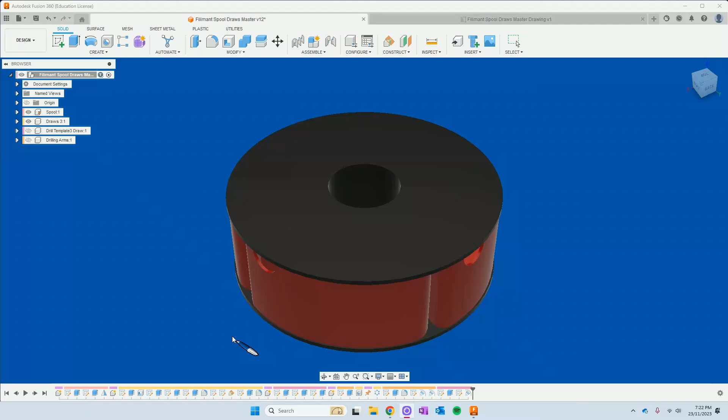G'day guys, this may look like just another 3D filament drawer project, but it is so much more.

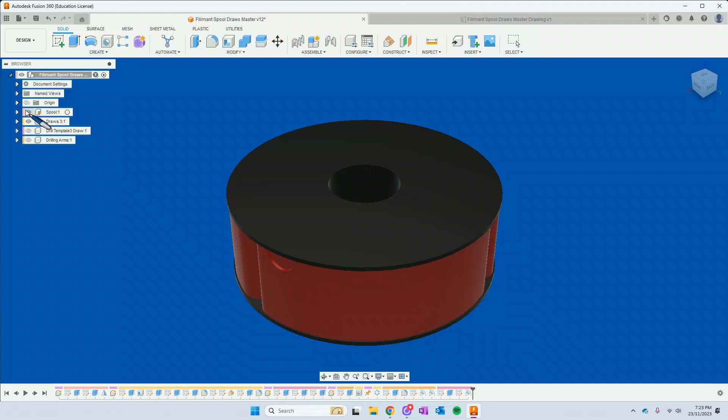It's capable of having the number of drawers change by me typing in a different number, and you'll see it's now changed to a 5 drawer. If I change it down to a 3 drawer, and I'll show you how in a moment, you'll see that it will update to just a 3 drawer. And if I turn the spool off, you'll be able to see that inside. So going back up to a 5 drawer,

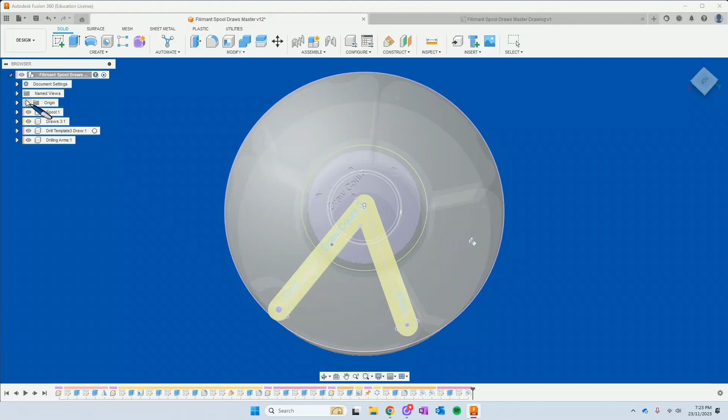and it's that easy. It also has a couple of templates on the top that when your spool is on there, it allows you to drill holes in the appropriate spots so that you know that you've aligned correctly for the screw hole, and there's a little knob that locks it in when the drawer is shut. So let's jump in and have a look at how this has all been done.

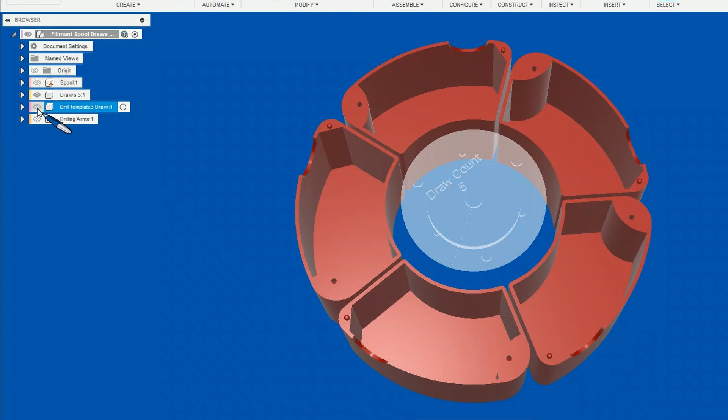So I started this project as a learning curve to make a parameter driven model that has multiple components. So you can see here I've got my spool, my drawers, my drill template and my drilling arms, and all of them dynamically change when I change parameters. Now you may not have played with parameters yet, but if you look under the modify menu, change parameters, a list will pop up that I've created that defines the different settings for my spool and then the number of drawers, and everything else will follow from there.

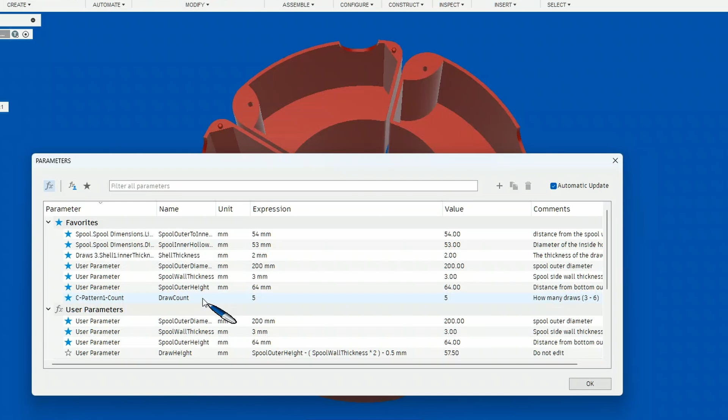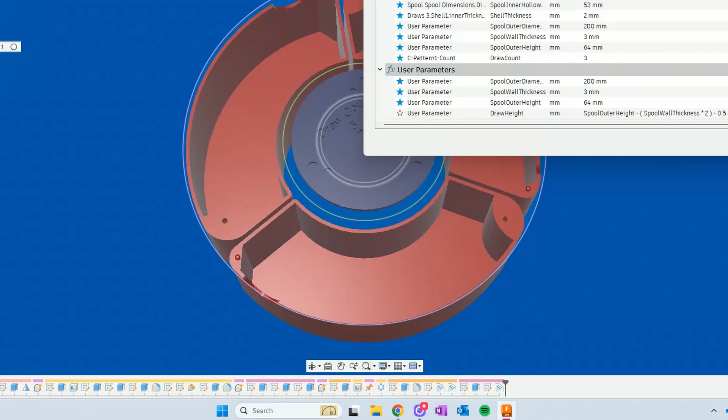So if I said that I wanted 3 drawers, I'll just move this down a little bit so you can see it, 3, and hit the tab key, it changes to a 3 drawer setup. And my position of my screw holes, my dimples, my finger holes, everything automatically adjusts, and my drilling arms and drilling template on the top also adjust automatically.

So this took quite a lot to learn how to do, and I'm not going to show you all of this in this video because there is a lot to cover, so I'll break this up into a couple of videos, but this is just a quick teaser to show you what is possible with using variables.

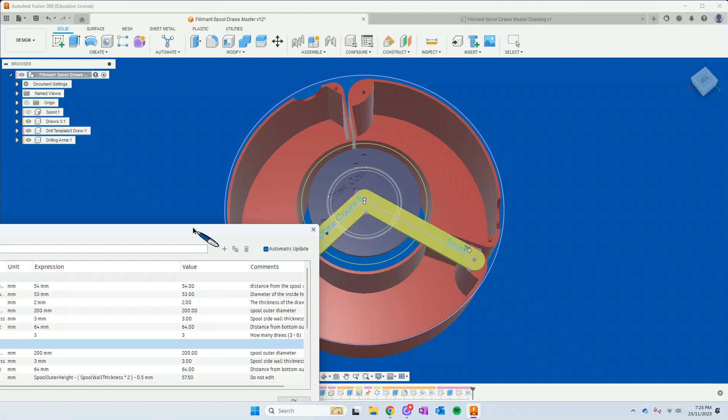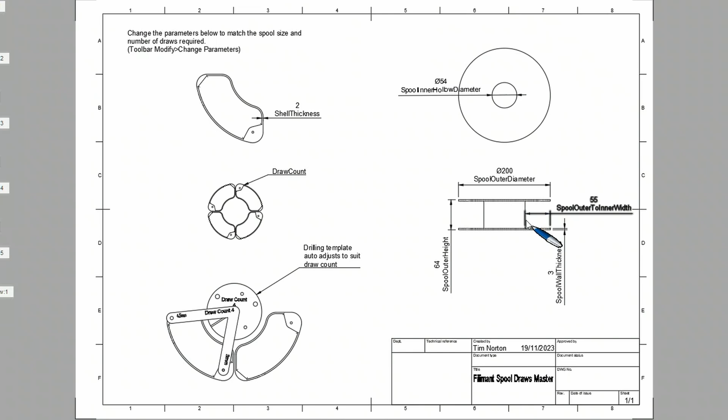So the variables that I've created in mine you can see here. So we've got the spool inner to outer diameter, spool hollow diameter, so that's the inner hole that you would hang on your spool holder. You've got the width from the outer edge to the inner edge of your filament roll. You've got the wall thickness, and you've got the overall height of it. And then you've got your drawer count and shell of the drawer thickness. Probably don't need that one, but if you wanted to make it a stronger drawer, you could add that in.

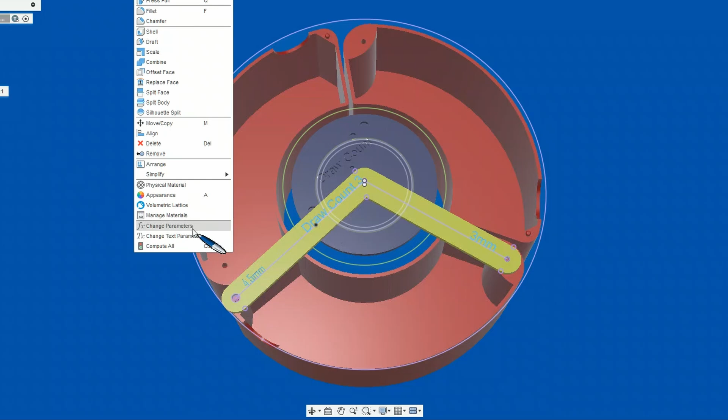So going back over to here, if I jump back into those parameters, and I'll just resize this so it's a little bit easier to see. So if I change something like I want my drawers to be bigger, so these will be 250 mil, the overall size grows. Now the gap in here you've noticed has grown. That's because my inner wall is currently 53 mil. That's this dimension inside here.

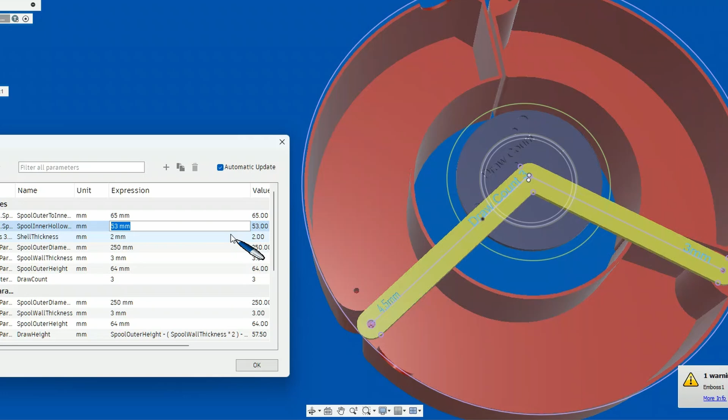So if I change that up to say 80, actually it's probably too much for 250. Let's go to 65, and the wall will shrink in. So it's completely dynamic. If I have a roll that has a wider width on it, so outer spool height will make that 80. My drawers become, I just found a little error there that I need to fix, but my drawers become taller. So I haven't constrained something correctly for that finger hole, but I will come back and fix that.

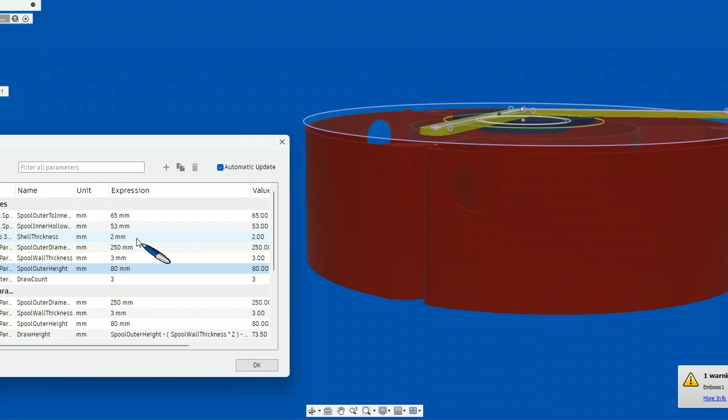So yeah, it's pretty cool that we can change every single dimension and have the drawers auto follow to suit that, and this guide for drilling out your mounting hole and your locking dimple also follows automatically. So I'm just going to fix up this finger hole one, and that will be the only little bit of the drawing we're going to play with at this level.

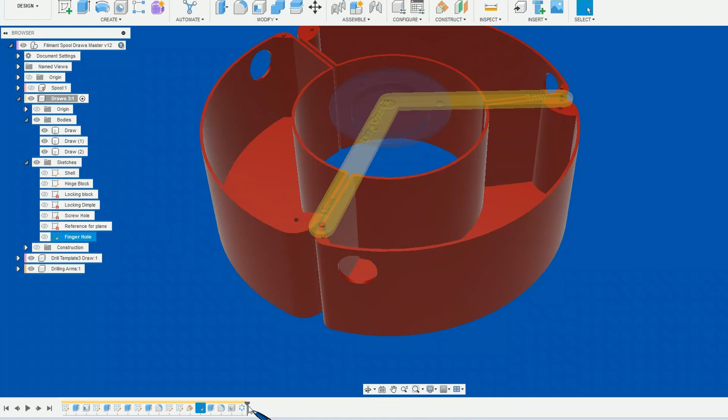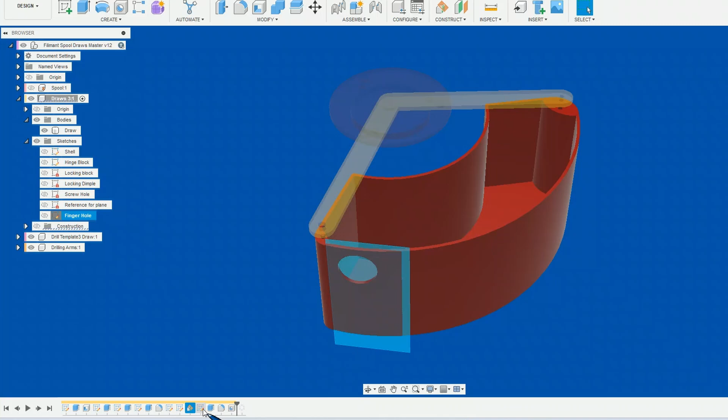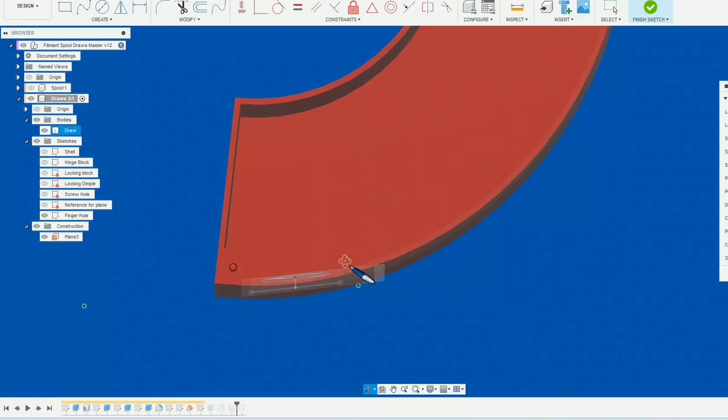So I've enabled my drawers component, and just to make it a little bit less complex, I'm going to slide that back. So I've just got the one drawer to look at, and I have a drawing here called finger hole, so I will edit that one. Doesn't want to edit. Don't know why that wouldn't double click, but so what I've got is there's a plane that this is referenced to that allows me to draw my hole. So that is this construction plane just here, and you can see that that's just inside so that I can draw a nice hole through.

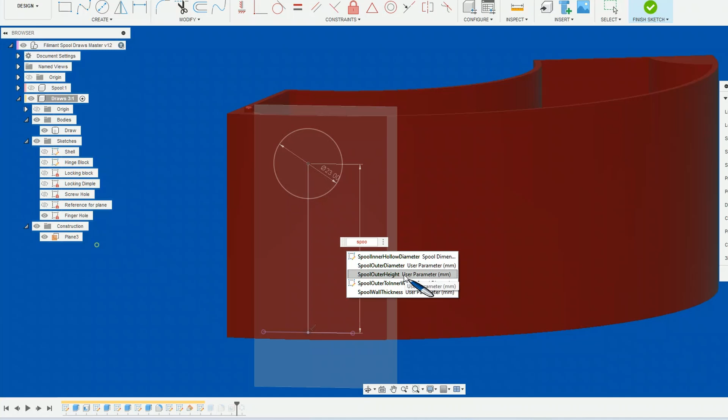And I've got a reference that I've pulled off of another drawing, but this is my problem here. I've drawn a line up and I've forgotten to add a dimension to it. So if I now dimension that, and instead of just typing in a number, I can type in something like spool height. I think that one will do. And I'm going to have to take a little bit off of it, and I can't remember the exact numbers, but let's take off spool wall thickness, and then I'm just going to take off another millimeter. So that should sit it up.

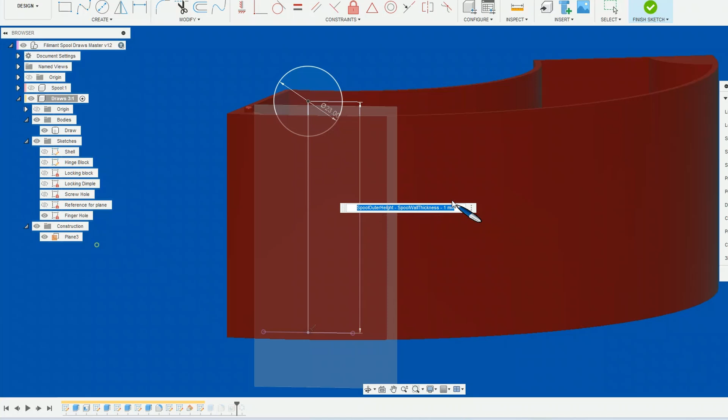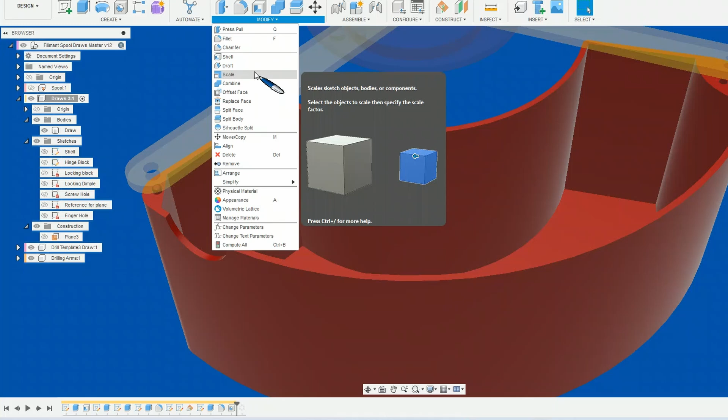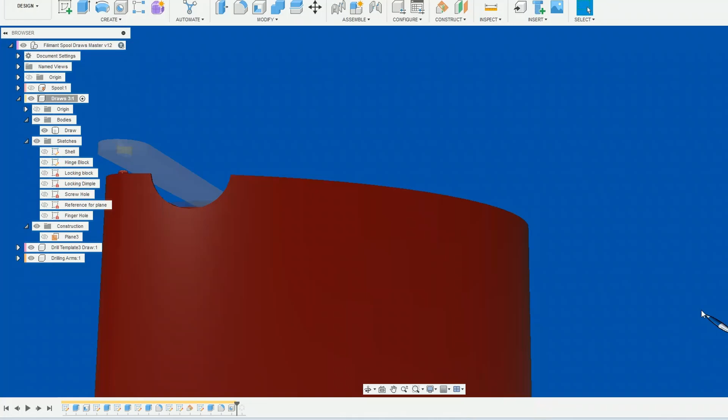It's sat it a little bit too high, so I will just add a little bit more of that deduction on there. So I'm going to take maybe 4 mil off. That'll do. It's not quite center, but you can now see that, turn off these extra features, constructions, that has now adjusted, and hopefully if I change the number of the height again, so we're at 80, if I go back down to say 60 and move that out of the way, it has followed it through. If I go up to 100, so it's now following it correctly by using parameters instead of fixed values. Alright, we'll catch you in the following videos where we talk in detail how we achieve this.